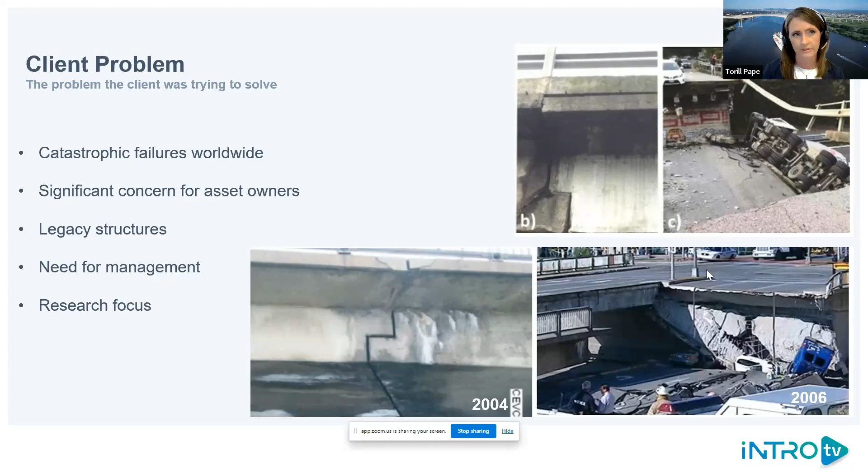And so TMR, as a rule, we don't allow these types of bridges on our network, but we do have them as legacy structures, and we need to manage them carefully. And there's still some questions around them about how do we manage them and what do we do. And so that just set up the research project that we embarked on under our NACOE banner. We have a broader program of work where we're inspecting and looking at how we manage these structures more broadly, but there were some specific research questions that we wanted to ask.

Now, these halving joints, or Gerber joints as some people might know them internationally, or dapped end joints, they were a feature back in the day. They were aimed at getting extra length out of spans for bridges, or also trying to get a more streamlined effect in terms of an architectural feature. So they were quite prominent back in the day.

The problem with these particular joints is that they are linked to being low redundancy. They've obviously got links to bridge collapses, noting that also the Morandi Bridge has some Gerber joints in it as well. And so we identified these as high-risk components. And low redundancy means there's just no alternative load paths to capture where the load can get down to the ground when we've got heavy vehicles.

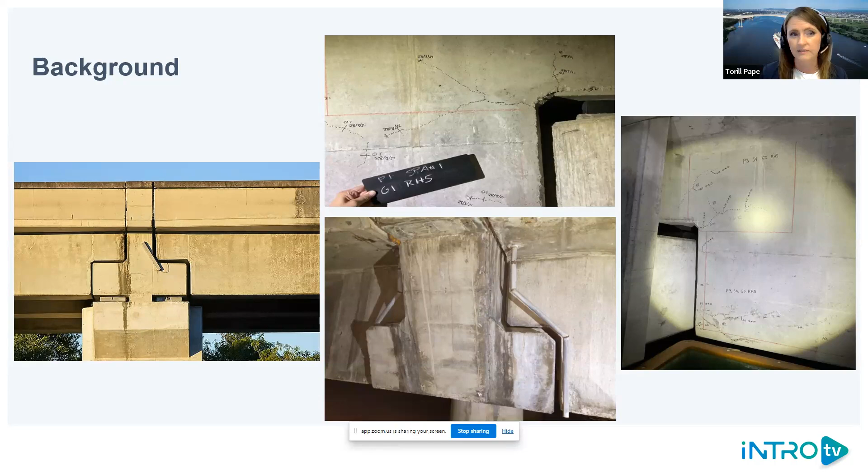So we've got lots of questions, and they have vulnerabilities that we need to manage. So that's just set up the research project. And so when we start thinking about the objectives and the outcomes when it comes to this research project, really this is about helping TMR understand or improve our knowledge on the behaviour and the structural capacity of these bridges that have these halving joint features, so we can better manage these bridges in a risk-informed manner.

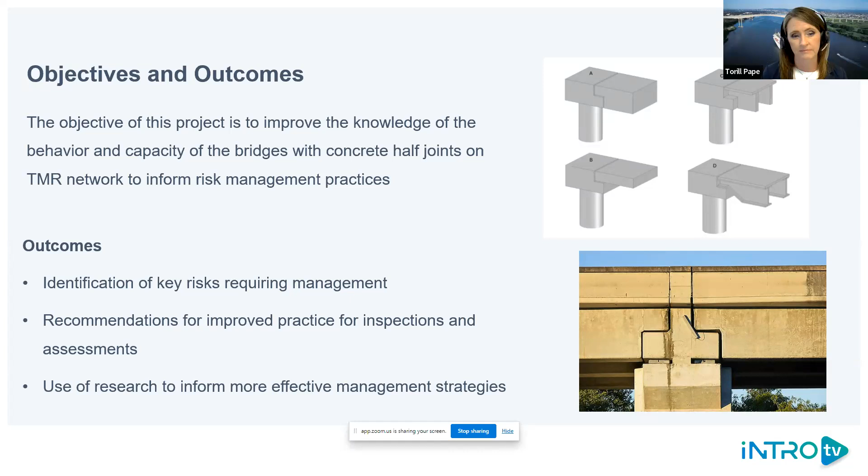And so the outcomes that we're looking for are things like how do we identify these key risks? How do we then recommend the practices for inspection and also structural assessment? And that links also to heavy vehicle access management. And then how do we then develop up effective strategies? And so I'll hand over to Tatiana now, who's going to go through some of the more details of this research.

Thanks, Tatiana. Thank you, Torill, for that great introduction to the project. So I'm Tatiana Sanchez, portfolio leader at NTRO, and I will be taking you through our findings from the project, as well as the benefit that we have identified.

So when we started this project, we didn't know how many bridges with halving joints were on the TMR network. So through this research and in partnership with TMR, we identified the types of halving joints as well as the ages of the bridges and the design classes as well. So from TMR's assessment work, we started understanding the bigger risk, what has a problem, what doesn't have a problem, and the key questions that we had: was corrosion an issue in this type of bridges? Is fatigue a concern? How do joints perform when they fail? And what do failure mechanisms look like?

So we did extensive research, and we also looked at existing UK guidelines on managing concrete halving joints, and we added insights from an Australian context. So we had some data, and that data showed signs of overstress in certain joints. So based on this, we developed a research program under the NACOE program. So here is what we found.

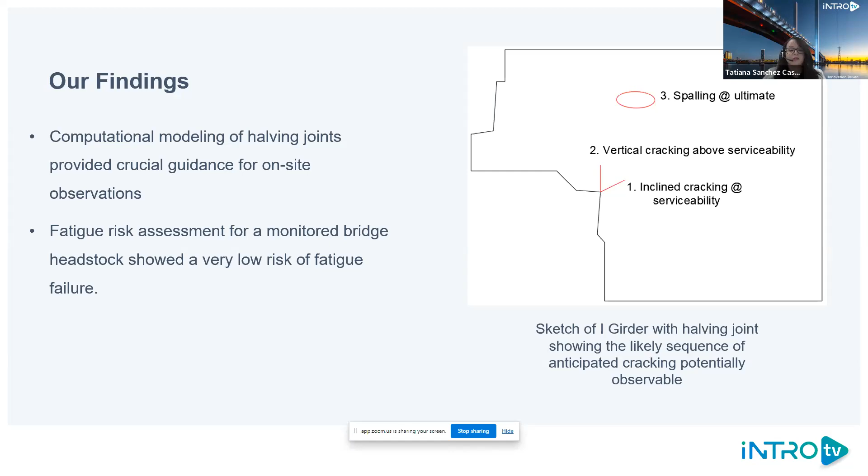So for super T girders, the strength of the halving joint mainly depends on how force develops in the strand, and we need to keep an eye out for cracks. So our focus should be on two types of cracks: any cracking at the re-entrant corners and those that appear in the soffit, specifically between 1 to 2 meters from the end of the girder. So quantifying these cracks will help us to better understand the girder's performance under stress.

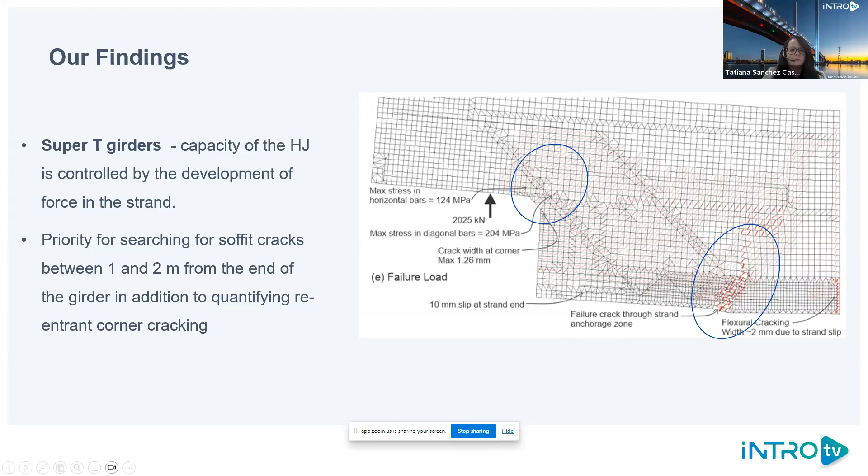So we can see here a screenshot from our finite element analysis at failure load levels, and that highlights, as I just mentioned before, that we need to monitor cracks not only at the re-entrant corner, but also on the soffit. So our findings show that estimating the capacity of the halving joints could be improved by more precise measurement of the strand development, and this will give a clearer understanding of the joint's strength.

So we also ran pull-out tests to check the bond between strands and concrete in pre-tensioned bridge girders. So these tests help us to really understand how the strand and concrete work together under stress, which is key to know how strong and reliable these joints are.

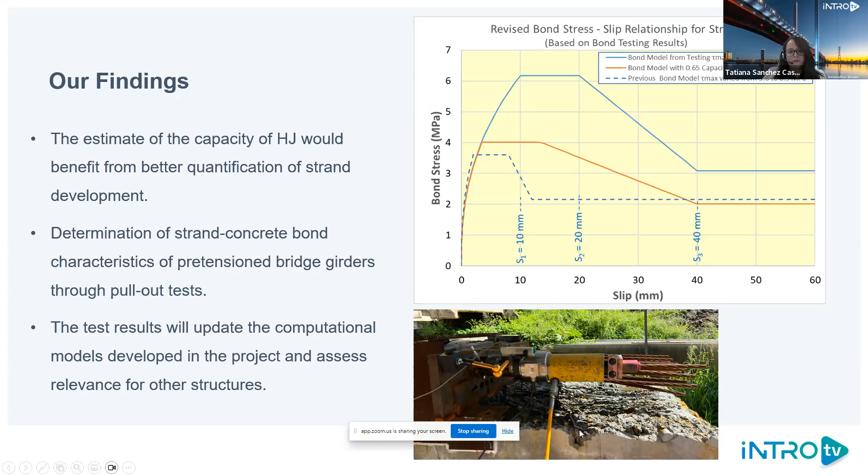In terms of benefits of this project, the key benefit is that it provides TMR with a comprehensive knowledge base to better manage risk associated with high-risk bridge families, and it also supports TMR in using best practices for assessing, managing, inspecting, and maintaining bridges with half joints.

So by following these proven methods, TMR can also identify any potential issues earlier, reduce the need for last-minute repairs, and avoid unexpected bridge closures. This proactive approach not just cuts down costs, but also helps extend the life of the bridges. From an environmental angle, keeping up with the maintenance and extending lifespan can lower the use of resources and reduce

the environmental impact. So in summary, this project not only equips TMR with essential knowledge, but also helps to manage risk more effectively and establish a solid foundation of best practice for ongoing maintenance. So together these efforts are designed to enhance safety, reliability, and lifespan of critical infrastructure. Torill, would you like to add any of the benefits that this project brought to TMR?

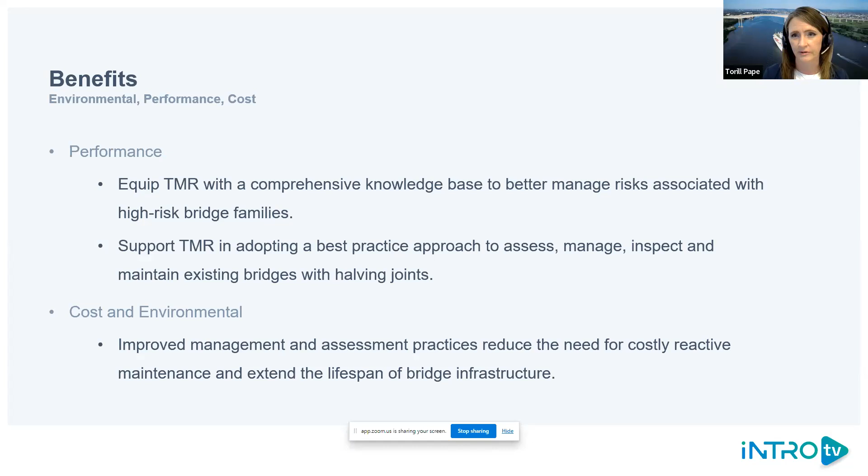Thank you. I hand back to you for the second part of the series. Yeah, so this is our next project. So we've gone from a major project of 4 years plus to something that's probably a little bit more bite-sized, but certainly a need for us in TMR. And this is all in relation to construction vibrations and how we manage that for the risks

to our structures. So at TMR, we have a technical guidance note, TN03, and this is a guideline on ground vibration and air blast safe practices during construction. It includes, but it's not limited to, acceptable levels of vibration from air blast, and the minimum distance of vibrating rollers that we need to keep to maintain our structures so they don't crack and they don't get damaged. This particular document lacks specific reference to these vibration limits for our structures, namely bridges and

tunnels. And so we commenced a bit of a revision on this front, and we got a lot of feedback internally, first of all, and we've also been getting some external feedback that the document is quite out of date, and also how are these limits actually derived? How are they actually justified in the document? Because we have a supplementary table that helps provide some maximum vibration limits, but we have often been challenged on that by industry about the veracity of this particular table.

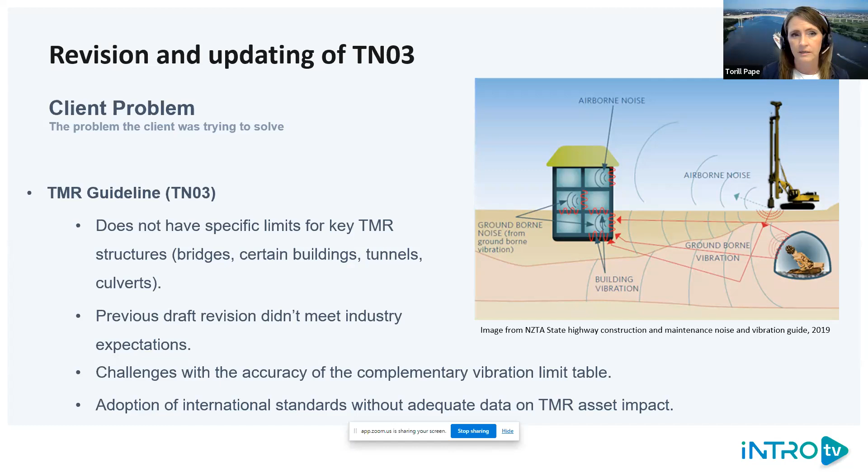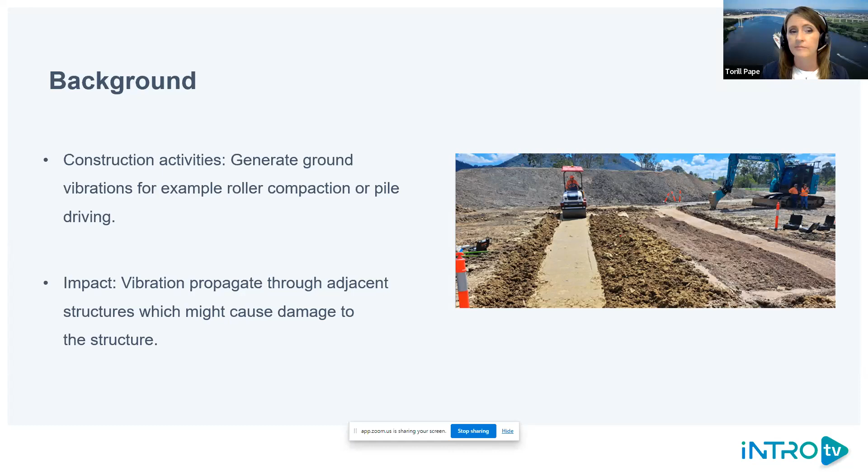So just in terms of background for this particular project, we're looking specifically at vibrating rollers, and construction activities do impact our infrastructure. And there's also linkages to pile driving and things like that, and the impact of the vibrations through the ground does impact our infrastructure. And what does that damage look like? So if we have a look at what our objectives are for this research, we really wanted to look at providing some better clarity for our TechNote 03.

We wanted to update that to say, well, what is the efficient risk management that we should be adopting, and having that evidence-based rather than something that's from quite some time ago, and is there potential changes that we need to update, particularly when you start considering international best practice. Because we don't want to restrict, obviously, development, so we need to be sure about how do we keep things working on site, and we're not just putting numbers out there that are just for numbers' sake, that these are actually what we mean and there are limits for what we need to do.

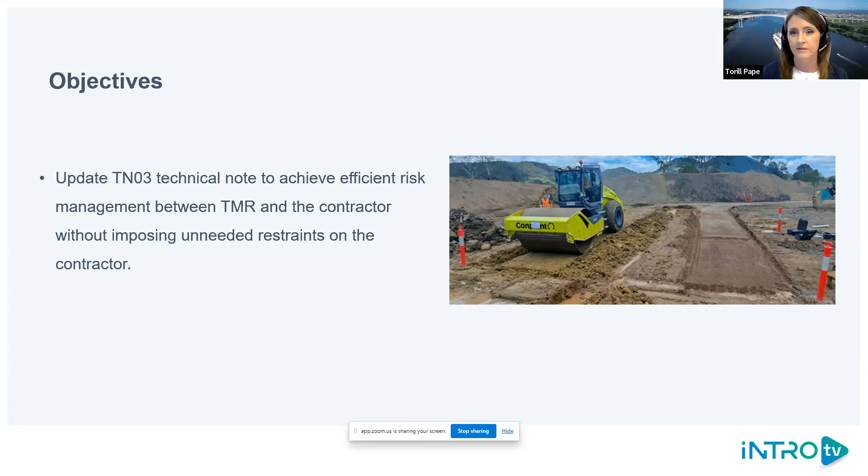Tatiana, I'll hand over to you for this next one.

Thanks, Tor. So now I'll take you through the key outcomes, findings, and all the benefits of this project. So in this slide, we cover the main updates, including vibration limits, roller classification, and working distances. So with the TN03 guidelines now updated, vibration limits apply to a broader range of structures. So this means that the guidelines cover different types of buildings and infrastructure, helping to better protect them from potential vibration damage.

We also updated the classification of the roller groups, as Tor mentioned, to better represent the modern equipment that is used on site. And the minimum working distances have also been revised based on both the current guidelines and the results from field testing. So these distances help us keep construction activities safely separated from nearby structures, lowering the risk of vibration damage.

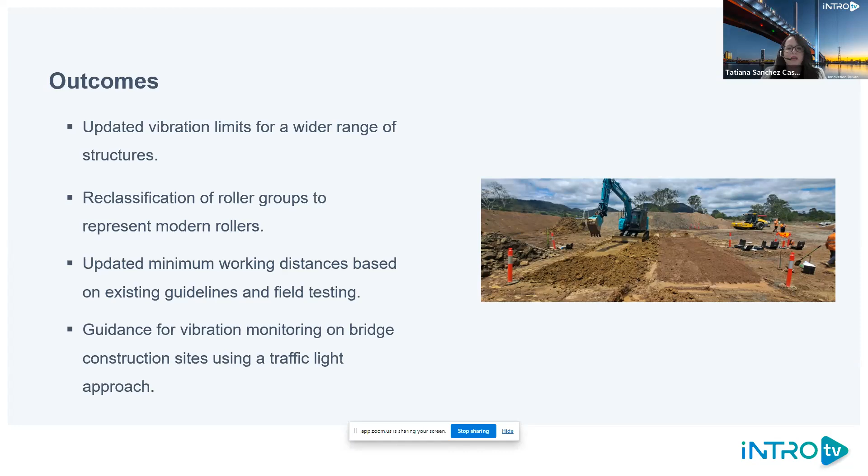And lastly, we have introduced a traffic light system for monitoring vibrations on bridge construction sites. And this color code system makes it easy to understand all the vibration levels. So we can see here the couple of tables that we updated and the traffic light system. So we have refined the structure categories to 4 different levels based on updated vibration limits. And this update was guided by all the literature review that we performed, but also with the new field data. Previously, we had 3 categories.

But now we have 4, and we have refined the peak particle velocity limits to range from 3 millimeters per second up to 25 millimeters per second. And instead of setting the guidelines based on roller type, now we use centrifugal force to decide the safe distances. And this guideline is also tailored to the type of structure nearby, unlike the old approach which had distance requirements that didn't really consider the specific type of structure.

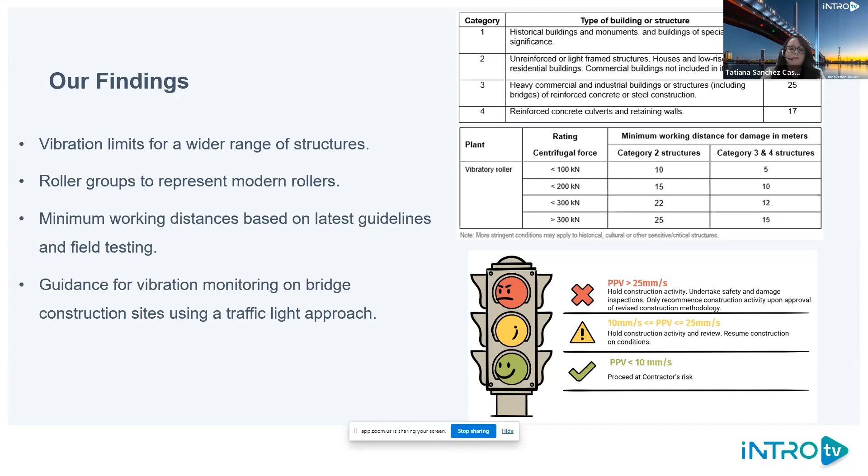And with the traffic light system, we use it for bridge construction monitoring. So as with all traffic lights, green is good. Green is when we have PPV under 10 millimeters per second, so we continue working as usual. Amber is PPV between 10 to 25 millimeters per second, so we need to pause and investigate the increase in vibrations. And red, we have PPV over 25 millimeters per second, so we need to stop immediately, and you may need to review and update your monitoring plan, and also adjust your working practices.

So in summary, this project has helped us to make some real improvements. We have updated how we handle vibrations to better protect the environment around construction sites, but at the same time, we improve worksite practices by reclassifying roller types to match modern equipment, and also adjusting the working distances based on recent guidelines and testing. So all those changes help us to better manage our operations, be more efficient and cost effective, while maintaining the safety standards. So a key part of this update was to really find that balance, making sure risk is well managed without putting unnecessary restrictions on contractors.

So as Torill mentioned, by refining this TN03, we want to give clear guidance that protects nearby structures from vibration damage, but also gives the contractors enough flexibility to work efficiently. So at the moment, the TN03 is a draft, is under review, and we will publish soon. Torill, would you like to add anything else in terms of benefits?

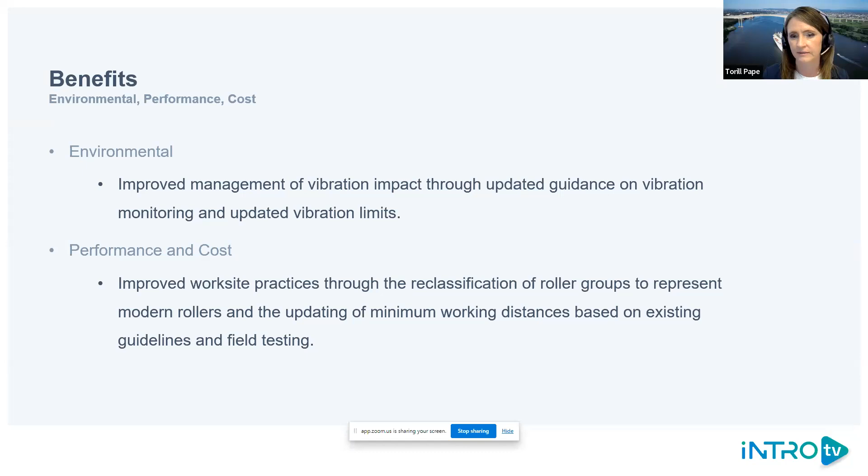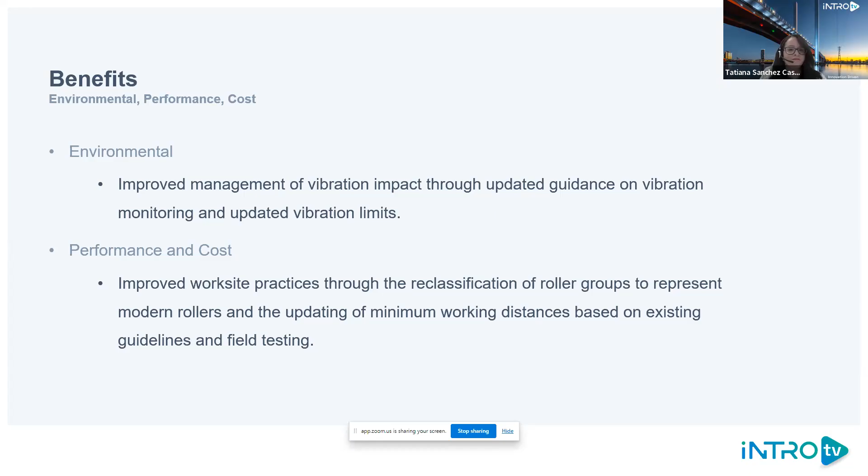Thanks very much, Tatiana and Torill. That was amazing. Torill pointed out that sometimes from very little ideas, big things really happen, and it appears there've been some wonderful benefits and some much needed benefits that have come out of this work. So many thanks for sharing that with us.